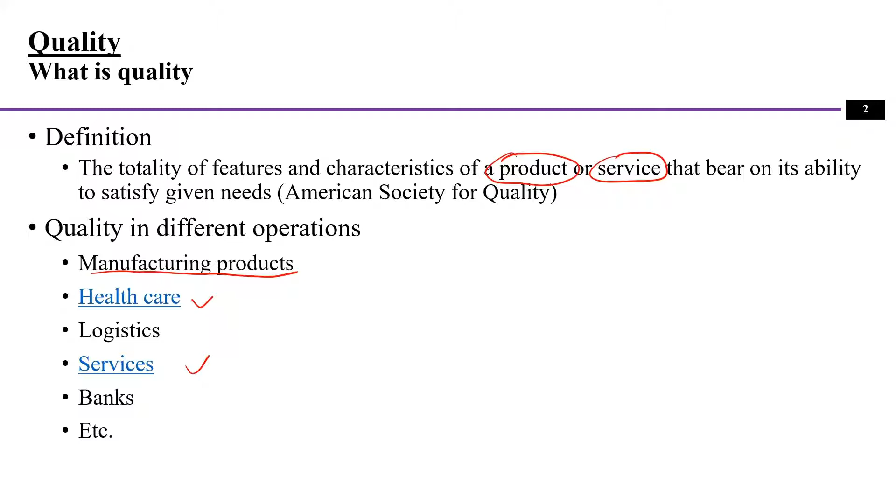So we talk about product and service, or good and service. There are similarities, and also there are differences between the good and the service. So please watch this video as well, and you will have a better idea about the differences and also the common characteristics. And in general, service quality has 5 dimensions. They are tangibility, reliability, responsiveness, assurance, and empathy.

So tangibility. In products, we can physically see the product, we can use it, and it's very clear. But service sometimes is not very tangible. However, as a service provider, you can actually make those services more tangible. For example, by improving the aesthetics of the service you provide, and also you can let customers feel that all their needs can be quickly met based on the service you provide them. And once you hear the brand of the company, you know what they provide, right? For example, when you hear Amazon, Apple, or Samsung, you all have an image of the company and its products. So that's how they make those services more tangible.

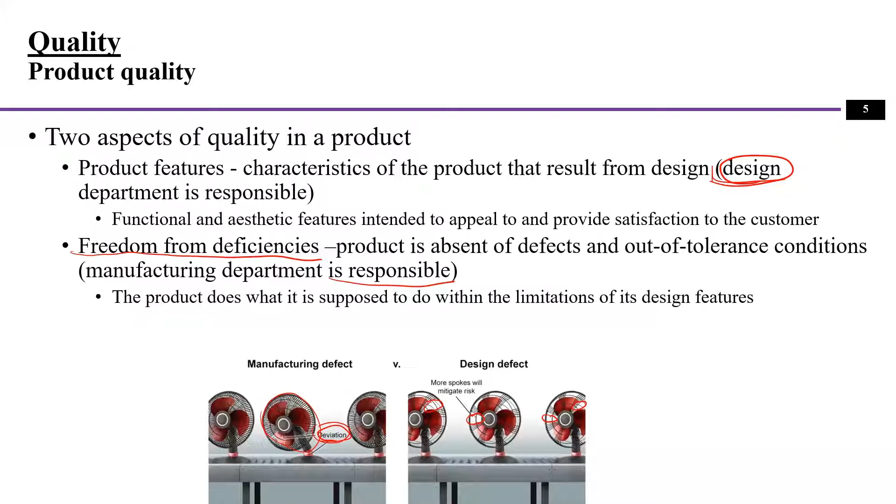Another type of defect is freedom from deficiencies. This means there's no design problem. The problem is the product you made actually has big variations, and some of the parts have a big deviation from the standard. We call this freedom from deficiencies. It means more of a manufacturing defect, not a design department's problem. It's more a manufacturing department's problem, taking responsibility. So these are the two aspects of quality in a product.

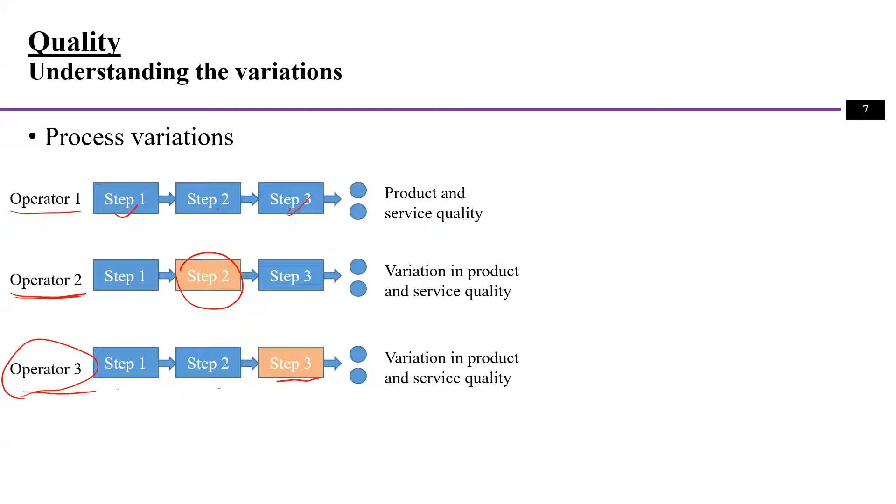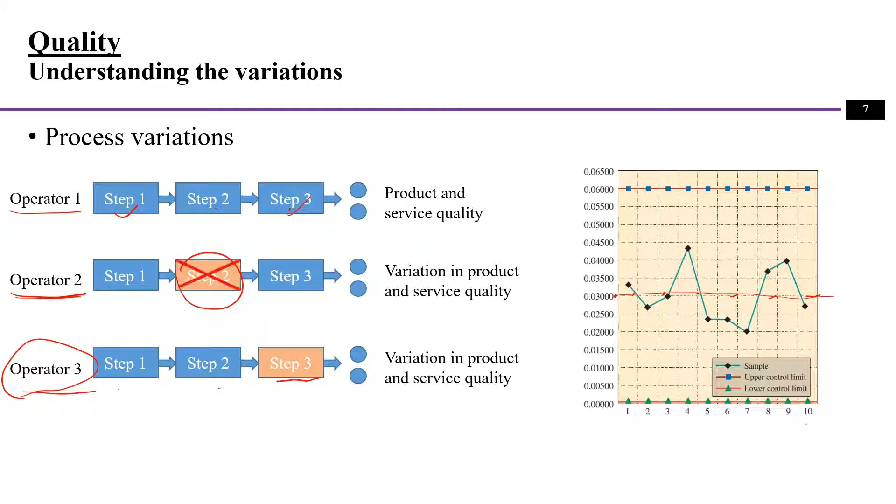They're around a common center, all within this range. So it won't be that all values are on this horizontal line—instead, it's all up and down a little bit. This is called a variation.

We know there are variations and they are common, but what causes those variations in processes? One cause is technology. For example, maybe you are making a little plastic product. Making that plastic product can be done in two different ways: one is injection molding, another is 3D printing. These are two different technologies, and you'll see how different the resulting products are.

For example, with 3D printing you will see the layer-by-layer shape of the product. With injection molding, you may see it created as a whole part. However, there might be some inner deficiencies or small gaps within the part itself.

Different people can provide the same service or operate the same machine, or conduct the same operation, and it can be a little bit different. So that will also create variations.

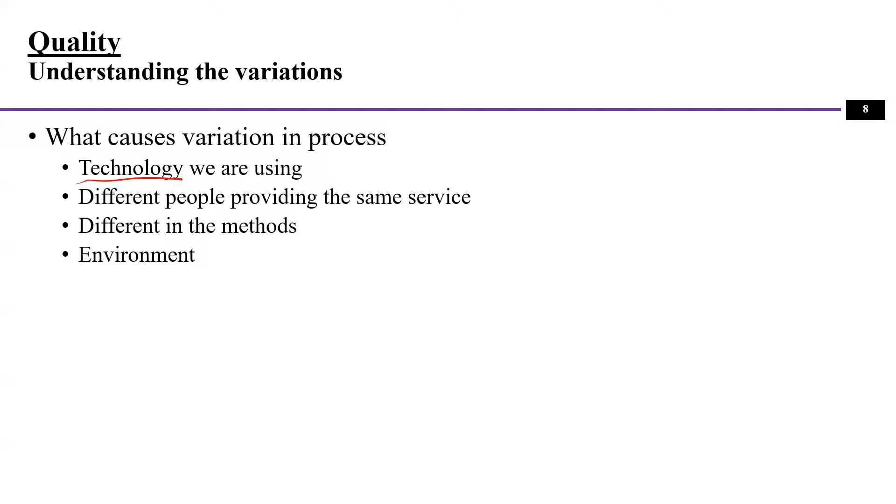So that's about service. Well, for environment, if it is a product, sometimes the temperature, humidity, or other settings of the environment can also affect the product itself.

What types of variations are there in production? One type is random variation. Random variation means the variation is built into the process itself, and there's nothing wrong with the process. The process is stable and predictable, yet there are still random variations. As long as all the data sets, all the results, are within an acceptable range, we call the process in statistical control.

The process being in statistical control means the values of the quality, or the different features of the quality, actually fall within an acceptable range. So that's statistical control.

Other than random variations, there are also special cause variations. The special cause variation is not part of the process. It can be some special event that happens, or some other factor intervening, and then causing the process to change.

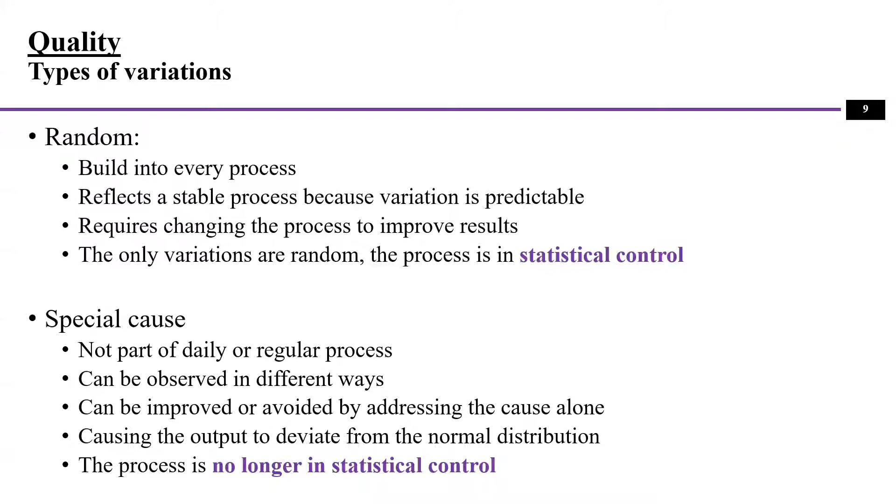If it is a special cause, then we say there's a problem, and the process is no longer in statistical control, because you'll see some or all, or even a trend, of the data set values actually out of control, not within the acceptable range. So these are two different types of variations. When dealing with quality problems, you need to first figure out what type of variation they are.

Now let's look at what statistical control is. Statistical control means we use data to track the attribute values, keeping all the values within the acceptable range, with the upper control limit, lower control limit, and a center line.

Here are the attributes, and on the x-axis are the sample numbers, from 1, 2, 3, 4, 5, up to these sample numbers. You'll see all these data points vary around a certain center, which means these are random variations. As long as they are within the upper control limit and lower control limit, the values inside this range are all good and acceptable, so we call the process in statistical control.

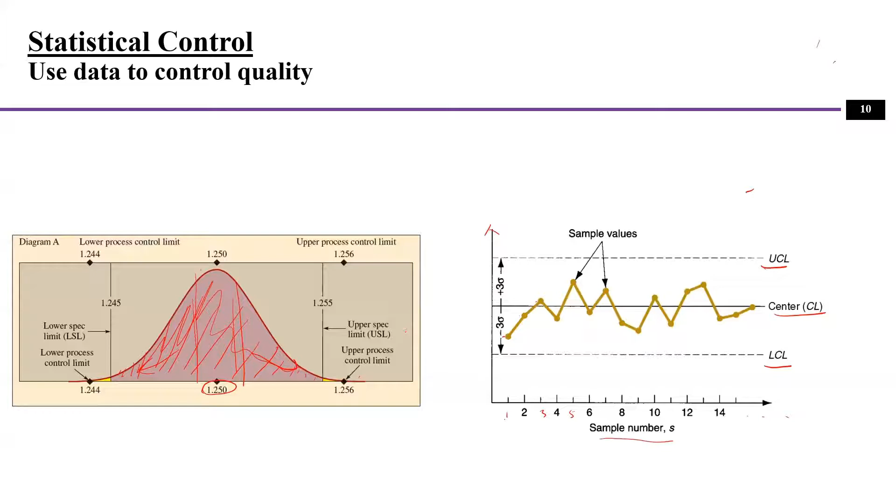And we just look at the control charts. Now let's look at what specific components we have for when we're developing control charts, because control charts are a very important tool in statistical control and also in quality control.

If you are a quality manager, production manager, or even a service continuous improvement department manager, you need to know how to use statistical control, how to draw control charts, and also how to use control charts to tell if your process has quality problems or not.

So what are the elements of control charts? First, we need to have an upper control limit and also a lower control limit. So these are the limits for this process.

If there are some data points outside the limit, that means they are not acceptable. If they are within, that means those data points are acceptable. So we have two control limits and also data points, and these data points are for samples - 1, 2, 3, 4, 5, into all the samples you have here.

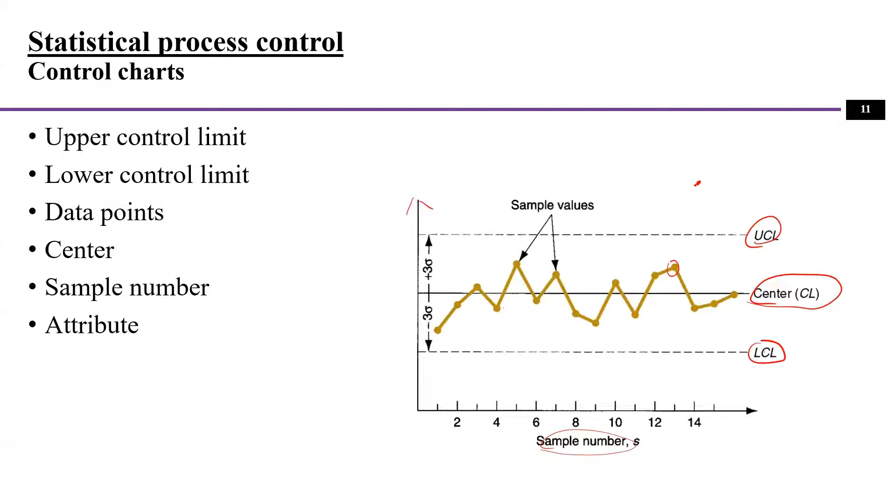You also need to have a center, which means this is the mean or average of the sample data points you have. And also the sample number and the attribute. The attribute can be a dimension or some other feature of the quality. So these are the basic elements of control charts.

Now let's look at some terms related to control charts. First is the population - this means all the data we have in our analysis. For example, a farm is growing a lot of apple trees, maybe 100 or 1,000 apple trees.

Within those 1,000 apple trees, these are different trees, and they will grow apples, and all these apples are actually different. So there may be thousands of apples here in our farm, but I cannot measure each apple's dimension.

So if I want to sell to some market, I want the apple size to be a certain dimension, otherwise I'm not going to use them. Now I want to measure what is the average apple size in our farm. So in this case, what do we do?

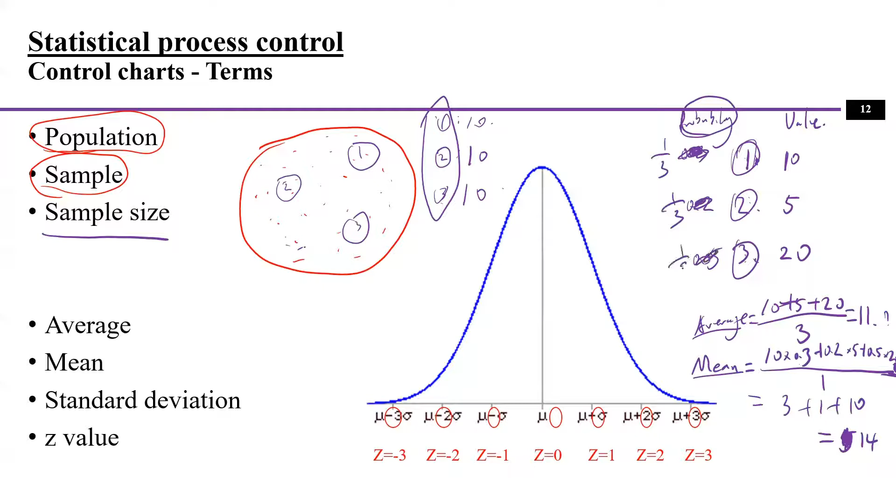But if they are the same, we can just use the average, right? We can use the average divided by 3 because, if they're the same, what is the probability here? Probability will be 1 divided by 3 for each. And then when you calculate the mean, it will be equal to 10 times 1 divided by 3, 5 times the probability, and 20 times the probability, right? It's the same as this average.

So this is why sometimes we use average or mean, and you need to understand the difference between the two terms and also when they can be used interchangeably. Okay. Next, the standard deviation actually means how much variation of the data points there is in the data set you analyze, right? So that's the standard deviation.

And for the standard deviation calculation, we use each data point. For example, we have x1, x2, x3, and so on, and then we use x1 minus the average squared, plus x2 minus the average squared, all the way to the end, xn minus the average squared, right?

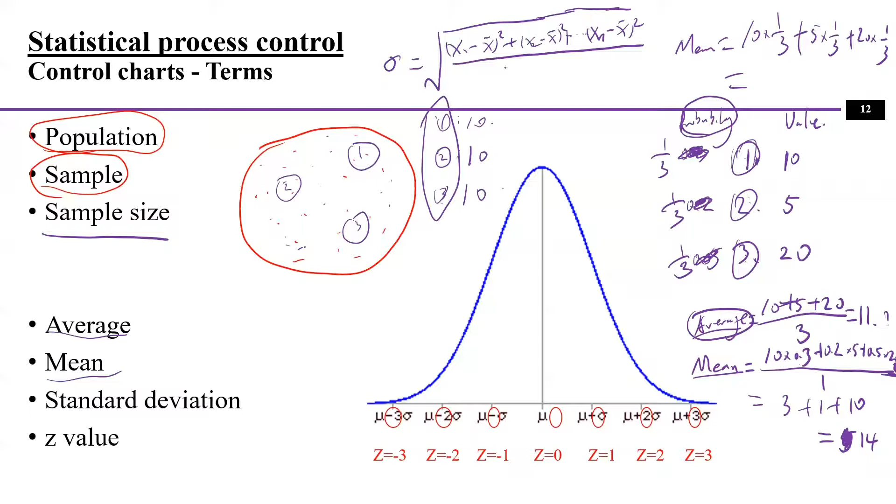And divided by, remember, if we are calculating the population, and all these data points are a sample of the population, right? We know the sample, we are looking for the population, then we need to use n minus 1.

But if we have all these sample data points and we are looking at the sample's standard deviation, then we just need to divide it by n, because there's no difference. Say if we are only calculating the samples, we have the sample data points and we calculate the sample's standard deviation, then divide by n.

If we have the sample data points and we're looking for the population's standard deviation, then we need to divide it by n minus 1, because this is more of a prediction or estimation, a rough estimation of a different size. So that's why we use n minus 1 as a correction for that. Okay, so this is how you calculate the standard deviation.

And the next one is the z-value. So the z-value means how many standard deviations it actually moves out from the mean, right? Z-value, how many standard deviations it moves out from the mean.

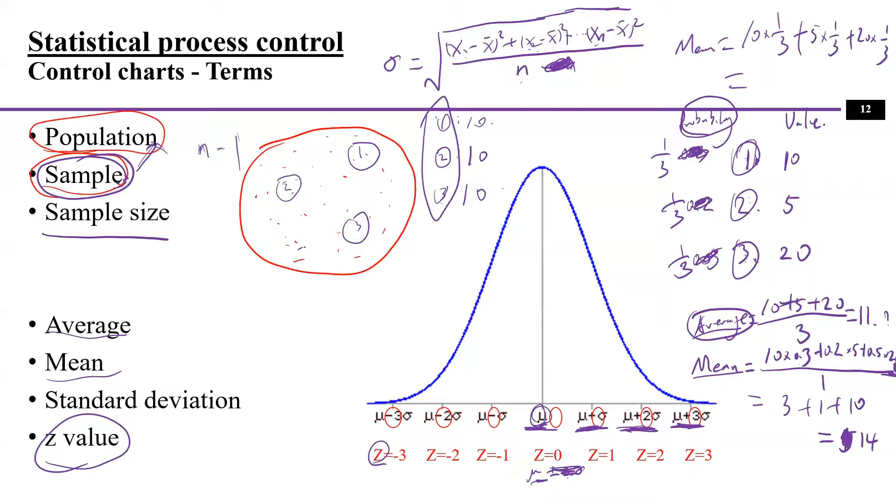If it is 0, then that's the mean. It can be mu plus or minus z times sigma. Because z is 0, you just have mu here, the mean here. So this is how you understand the normal distribution. Now let's look at a normal distribution table, because eventually during the calculations you will need to know how to use this normal distribution table.

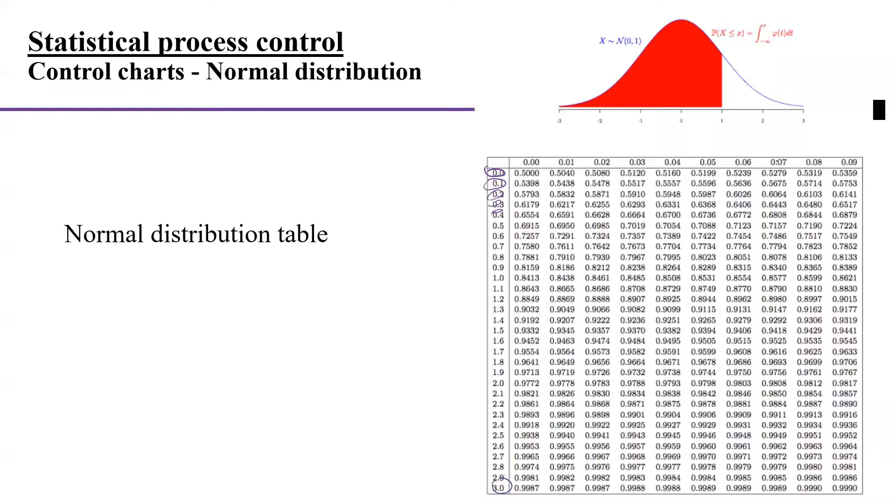So we'll see here that these are actually z values. The z will be 0.0, 0.1, 0.2, 0.3, 0.4 here until 3. And here, this is the first digit after the point. And here is the second digit. So now let's look at this: can you find the z value for a probability of 0.9744?

Where is 0.9744? Here, 9744, we have it here. We look for the first digit, which is 1.9. The second digit is 0.05. So in this case, it will be 1.95. So this is the z value for the probability of 0.9744.

Well, what does it mean on a normal distribution? If we are looking at a normal distribution with 0.9744, it means we are looking for this value, a dimension or some other thing. So this is the mean, and we are looking for this value. This will be mean plus z sigma.

And the probability all the way from the left to this end here is actually 0.9744. In this case, we just need to find the z value corresponding to 0.9744. Then we know this z is 1.95. Then if we know the normal distribution and the standard deviation, we can actually calculate this point.

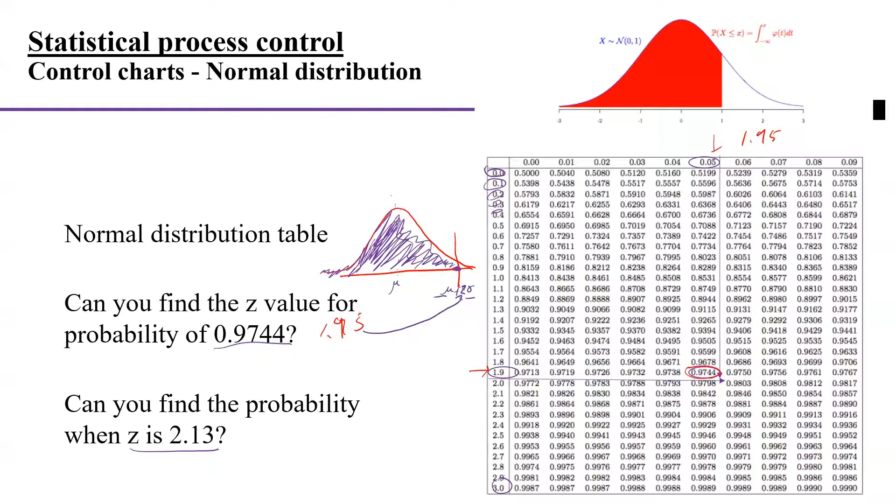Similarly, the other way, if I give you the z value, can you find the probability? For example, here a z value is 2.13. We know 2.1 is here, and then 0.03 is here. We just need to find this value. The probability is actually 0.9834.

Which means what? If there is a normal distribution, you have the mean, and there is a z value here, plus z sigma. You want to find out what the probability is until here. And then it will actually give you 0.9834. So this is how you use the normal distribution table to solve problems.

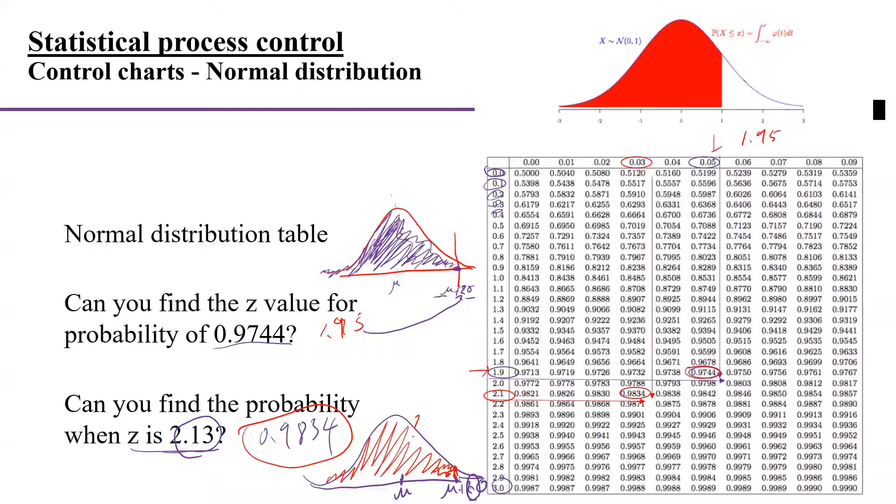All right, now let's look at two typical charts for statistical control. One is the X bar chart, the other one is the R chart. The X bar chart shows the process mean; we're calculating the process mean over time. The R chart shows the range of each sample.

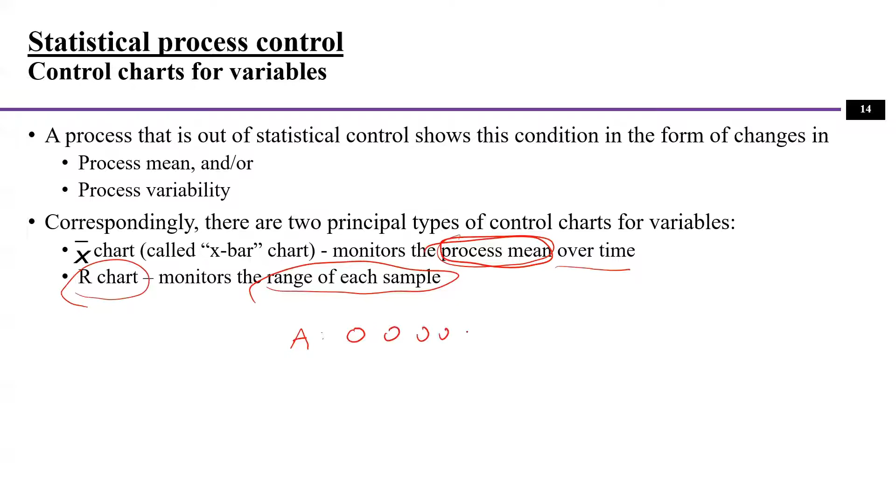So how do we describe this? For example, the apples again. Say we select four samples. Sample A, we select maybe 5 apples. Sample B, 5 apples. Sample C, 5 apples. Sample D, 5 apples.

Then X bar chart means we're going to calculate, say, we want to find the average dimension of those. So for the X bar chart, we will find X1 bar. That means we measure each apple's dimension, let's say the diameter, right? We measure each apple's dimension, and then we get an average, or X1 bar, okay?

Similarly, we can calculate the X2 bar. So we calculate the average dimension of these apples, right? And this is sample C, and this is sample D. So these are the samples: sample A, B, C, D. What about sample size? Because in each sample there are 5 apples, the sample size equals 5, right? Sample size 5.

All right, we know how to calculate the X bar chart. After we calculate those X bars, you can actually draw these points here and then find a chart, right? So this is how you calculate the X bars. Then what about the R chart? So for the R chart, R1 equals what?

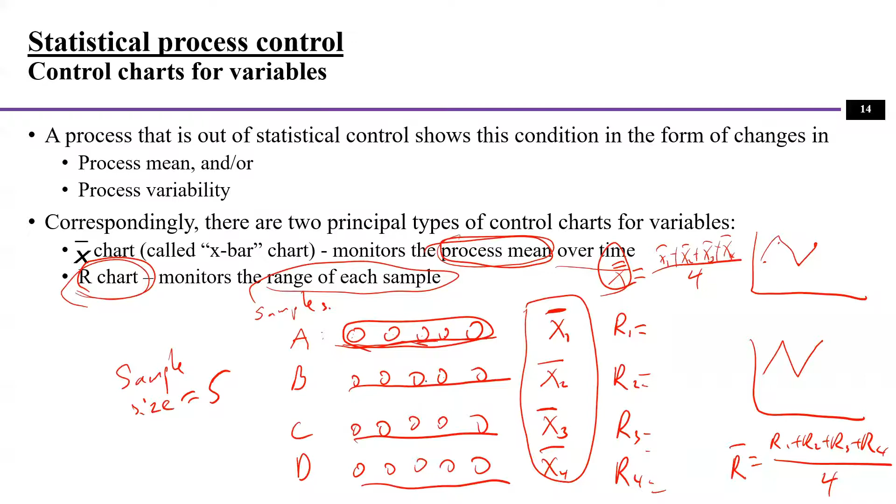All right, now let's look at one example here.

So the example here is, there are 8 samples, right? We already talked about, okay, there are 8 samples and the sample size is 4. We already know the sample size here. Its sample size is 4, have been collected from a manufacturing process that is in statistical control, right? And the dimension of interest has been measured for each part.

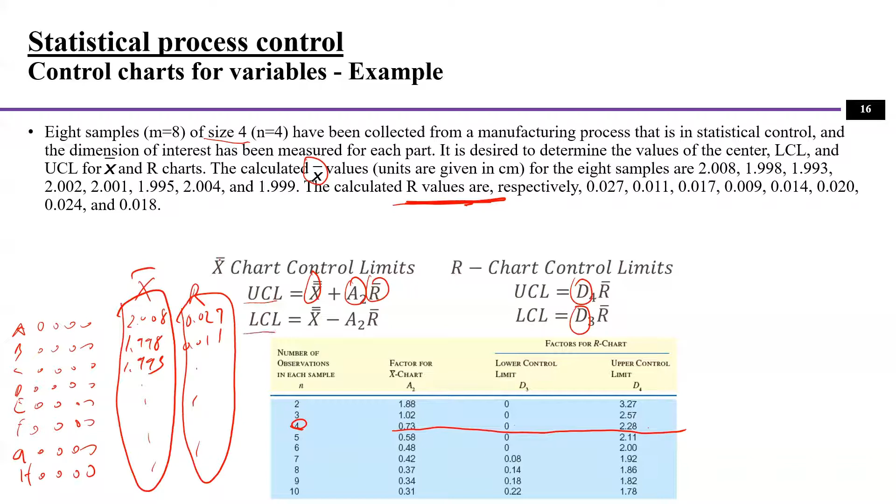And A2 is in this table, for which you need to find out, okay, what is the sample size? Here, the sample size is already given as 4. Now we just come here and find out the A2 value, D3 value, D4 value. Then we can calculate our upper control limit and lower control limit for the X bar chart, and also the upper control limit and lower control limit for the R chart. So this is how we calculate those.

Should be pretty straightforward. And then we can also draw the X bar chart because we already have those data points. We can use those data points to draw this.

And remember, in each control chart, there are some basic elements. We need to show the upper control limit, the lower control limit, the center, and also each data point connected, as well as the attribute values here, and our sample numbers here. So these are the basic elements of control charts. With the X bar values and the R values, you can draw all of those charts. Okay.

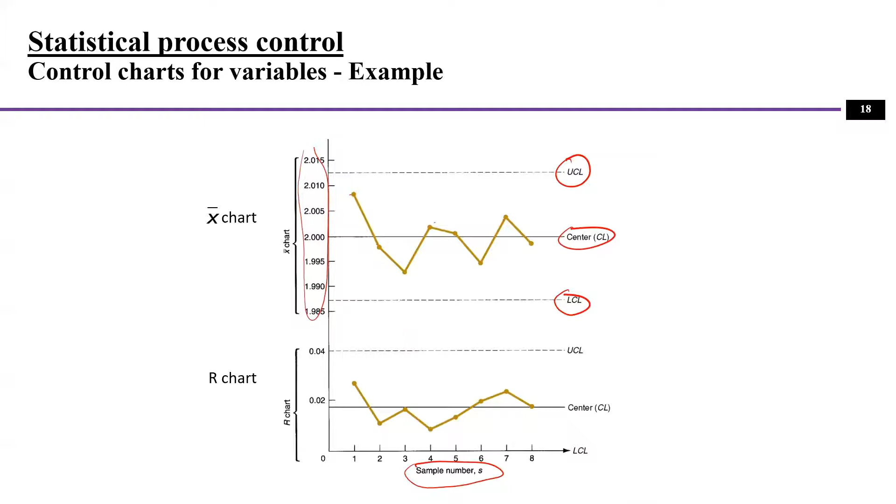All right, we talked about the X bar chart as well as the R chart. Now let's look at another chart, which is called the P chart. So P chart means we want to find out the percentage, or probability, of defects among certain observations or a certain sample, right? So in this case, how do we calculate that? First, we need to find out the P average value.

So P bar here is calculated as the number of defective parts divided by the number of observations. For example, we observed 10 items, and we found out only 2 are bad, have defects. Then P1 will be 2 divided by 10, right? Then we can calculate the other samples and find P1, P2, P3, P4, all of those.

And then we calculate SP here. SP is the standard deviation, and the way to calculate it is the square root of P average times 1 minus P average, divided by N. N here is the sample size. Remember, N is the sample size. Okay.

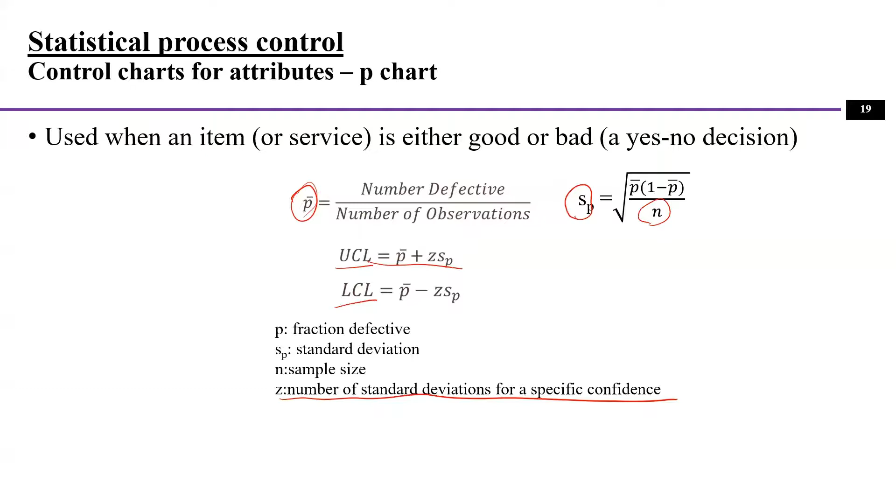And then if you want to find out the upper control limit and lower control limit, we can use this equation. For example, upper control limit equals P bar plus Z times SP, and Z is the number of standard deviations for a specific confidence, right? For a specific confidence. Now let's use one example to show it.

All right. So say an insurance company wants to design a control chart to monitor whether insurance claim forms are being completed correctly. The company intends to use the chart to see if improvements in the design of the form are effective. To start the process, the company collects data on the number of incorrectly completed claim forms over the past 10 days, right? So over the past 10 days.

And the insurance company processes thousands of forms each day, and due to the high cost of inspecting each form, only a small representative sample was collected each day. So how many samples? 10 samples, right? And what is the sample size? Now let's look at this table, and the data and analysis shown in this table. We collected 10-day samples. So we have 10 samples, and in each sample we have 300 observations inspected. All right.

And the number of incorrectly completed forms within the 300 each day is different: 10, 8, 9, 13, 7, and so on. And then in this case, we can calculate P1, right? P1 is the probability of defects. P1 equals 10 divided by 300. P2 equals 8 divided by 300. P3 equals 9 divided by 300, until P10. And then we have P1 through P10.

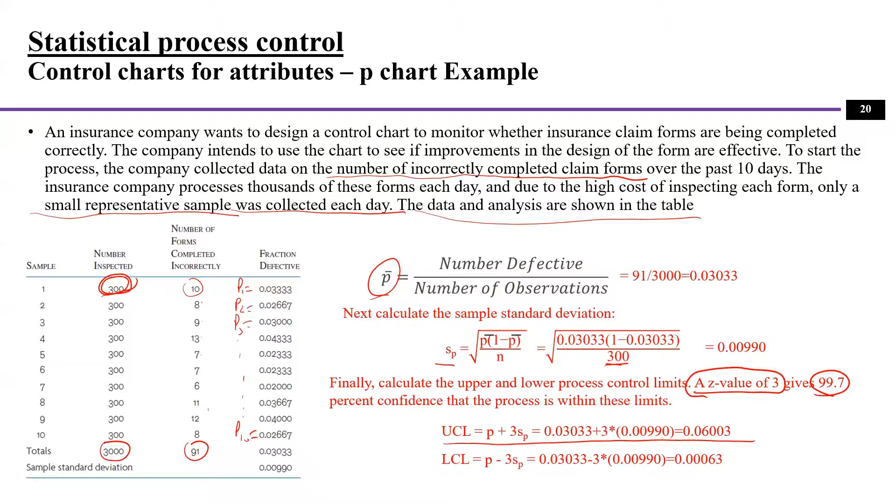So here, upper control limit equals P bar plus 3 times SP. Why are we using 3? It's because 3 is the Z value here. What we want to achieve is about 99.7% confidence. 99.7% confidence means we are that confident that all the parts are good. Then the Z value will be 3. Remember, when we use a normal distribution to show the variations, we are here. This is 99.7.

Okay. Pen this. Why can't I change? Pointer, pen. I don't know why I cannot change this back to pen here. All right, back to pen.

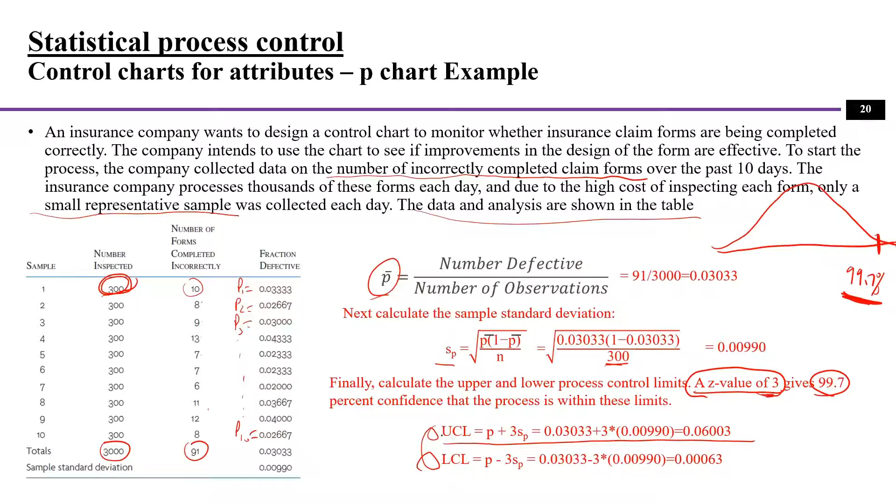This is 99.7%. Now remember, we're talking about normal distribution. How do you find the Z value? We know the percentage, then we can go to the table and find the Z value is actually 3. Then you find the upper control limit and lower control limit from these equations. After we have the upper control limit, lower control limit, and P1, P2 through P10, we can draw a P chart. This is the lower control limit, this is the upper control limit, and these are the P points. So this is how we draw a P chart.

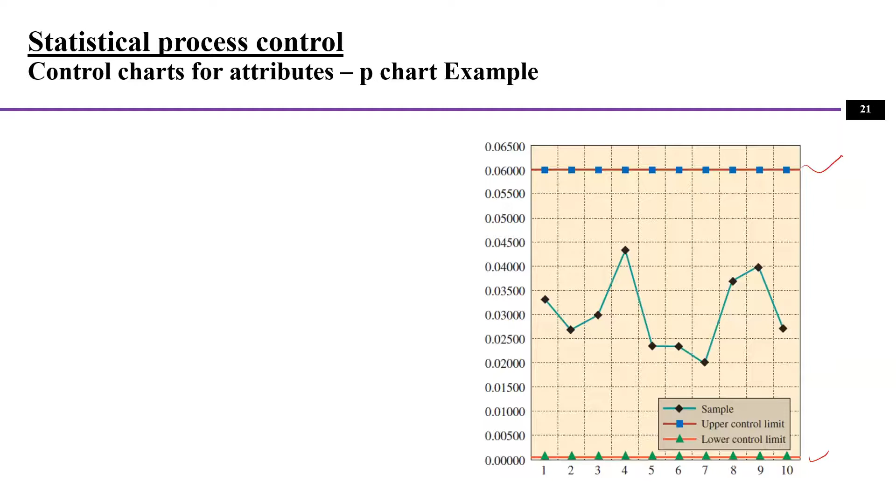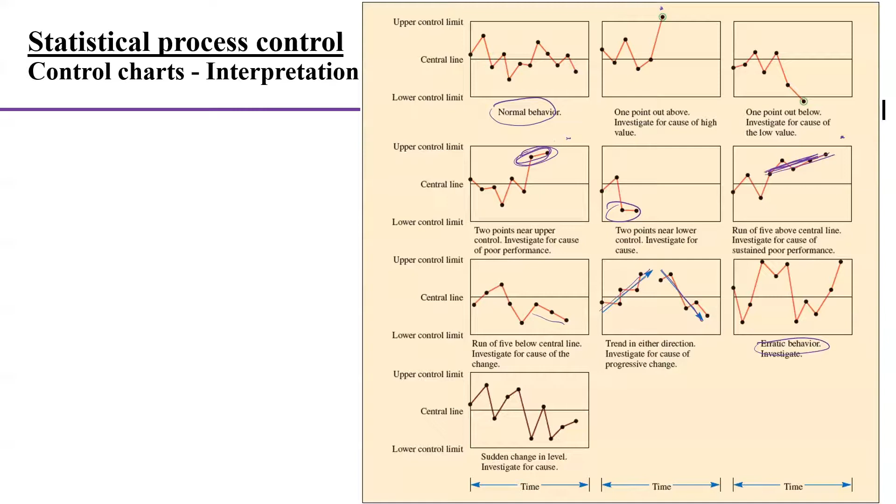Next, I want to talk a little bit about the different quality control programs people use in manufacturing companies. One is total quality management, another is Six Sigma, and also ISO 9000.

Total quality management actually started from the time after Japanese manufacturers started to dominate quality in automobiles and other durable goods. After the Second World War, Japan really survived and revived their production by making really good quality products. To react to that, American manufacturing companies started to pay more attention to quality, and this is how people started total quality management. I suggest you watch this video to look at what is actually involved in total quality management.

Basically, quality is not just the operators' responsibility, the person working on the last process who actually touches the products. Now quality starts from every employee in the company, from top management to the shop floor operators. Everyone should be responsible for quality, and should develop policies on how to analyze and how to maintain all of this. So this is total quality management.

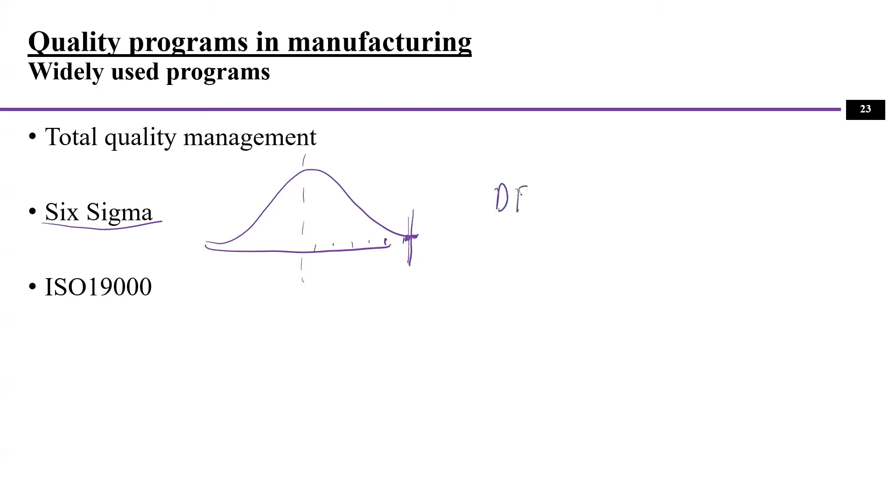Later it became a program where more continuous improvement also uses statistical analysis to improve quality. So this is Six Sigma, and Six Sigma can also mean a program for solving problems, which is define, measure, analyze, improve, control - the DMAIC process.

The DMAIC process guides you through how to define a problem, how to find out and measure the problem's performance attributes, and how to analyze. They give you a set of different tools to help you analyze the problem and find the root cause, and also come up with a solution to improve the problem, improve the system or process, and then you control it to sustain its performance. So this is Six Sigma as a program for problem solving.

Lastly, another widely used program is ISO 9000. It has been used a lot by manufacturers to show that the company has prepared documentation or policies on how you control quality issues, how you control the quality of your products. If you have all these policies implemented and prepared, and all the measures, and everyone understands what to do, then you can get this certification. When your customers or suppliers know that you have this certification, they will trust that you have better quality in your production. So this is about ISO 9000.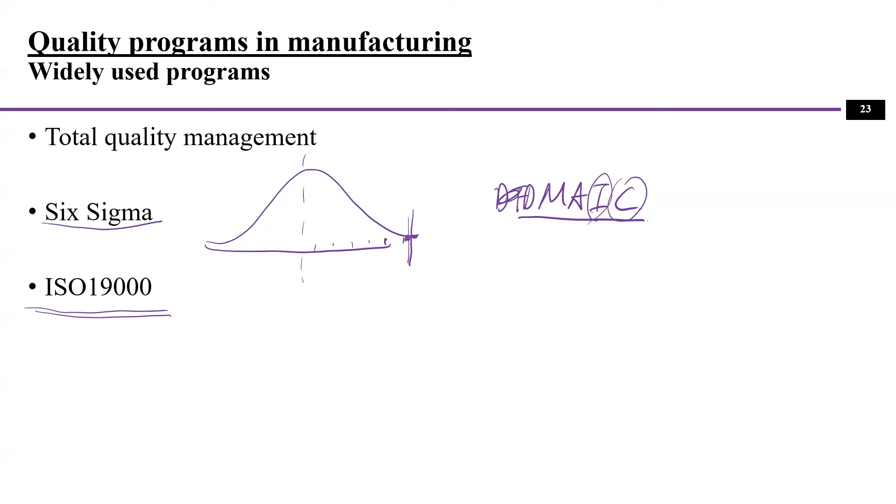But a lot of times ISO 9000 only gives you a very minimum set of requirements, and companies usually develop their own quality standards that are much higher than those. So these are the different widely used programs about quality control. All right, that's all about this lecture.